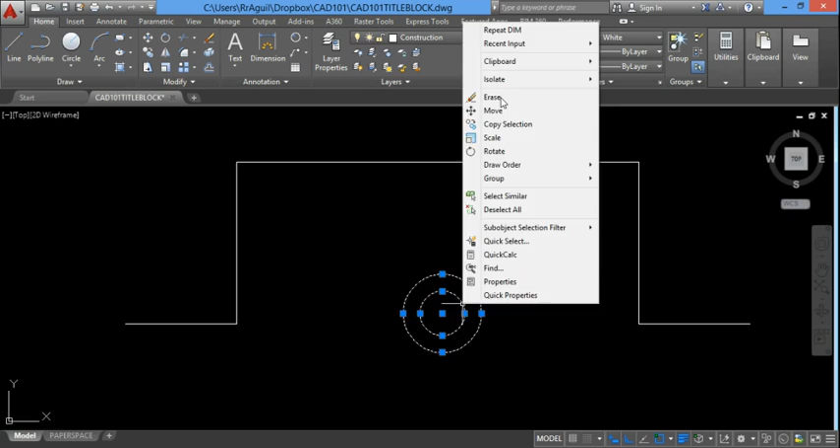Hello. This is the video for teaching you how to draw the garage door handle from lesson 4A.

I've already drawn portions of this object using the polyline command. One dimension is not labeled in the directions, and that's the thickness of the part. To determine the thickness of the part, you will have to do the following steps, which you see in step number 5, determining the thickness of the part.

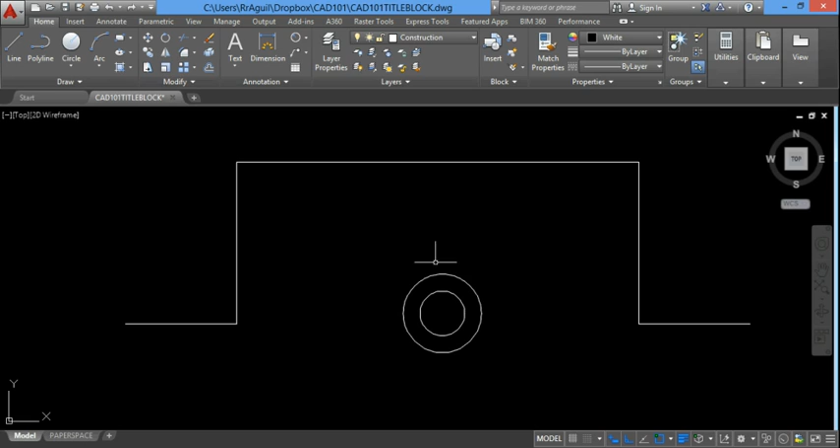Looking at our drawings, we see two radiuses of 1/4 and 7/16. You will need to draw two circles of 1/4 and 7/16, and then measure the difference between them. So I'll measure the distance between the two, and I would get 3/16. That'll be the thickness of the part. So the height of this is 2 minus 3/16, or as you gathered by now, 1 and 13/16.

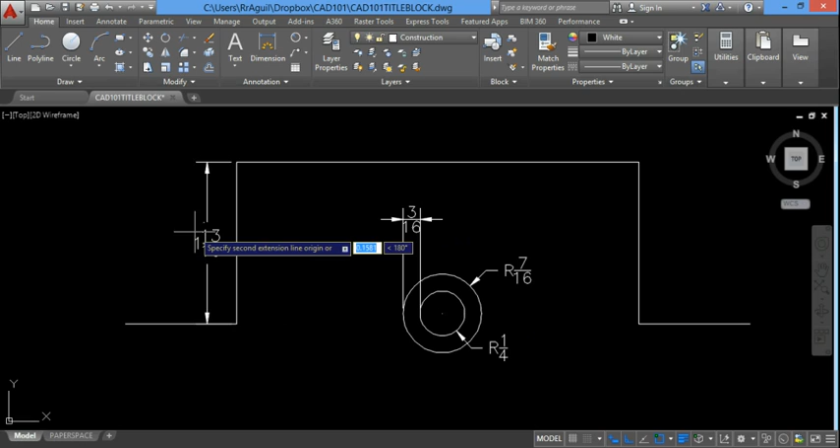Alright, so let's begin. I'll use the offset command first, set it to 3/16, and offset this object down. Then I'll use the fillet command and fillet it with two different radii. The exterior fillets are all 7/16, and the interior fillets are 1/4.

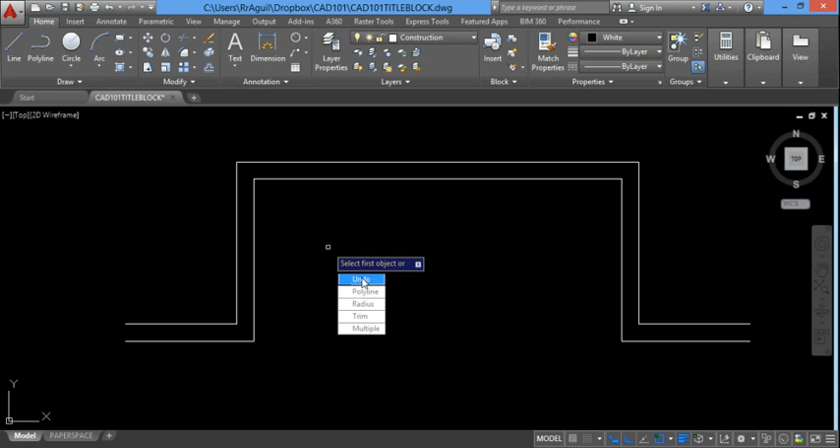When you pick the fillet command, hit the down arrow, choose radius first, and set your first radius. I'll do the 7/16 first, and then fillet all four sides on the exteriors of the garage door handle. I'm hitting enter with my keyboard to repeat the command. You could also right click or repick the command itself.

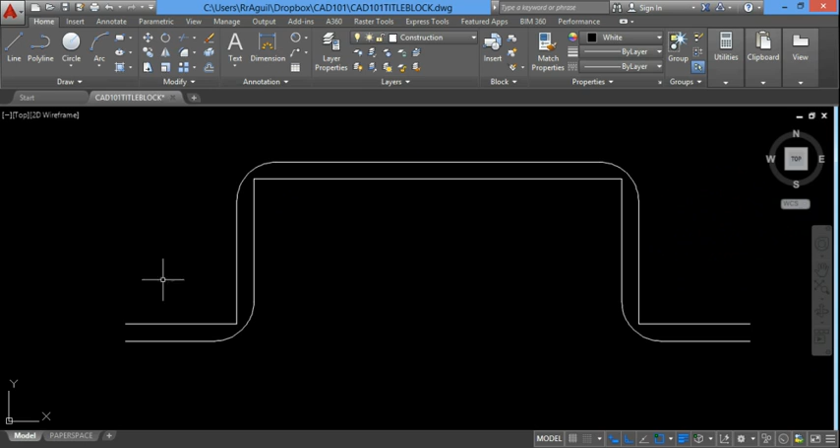Now to fillet the other four parts, I have to change the radius, so I will activate the radius first and change it to 1/4, and then repeat this 3 more times. From here, continue drawing the rest of the features according to the steps. I will get back to you shortly.

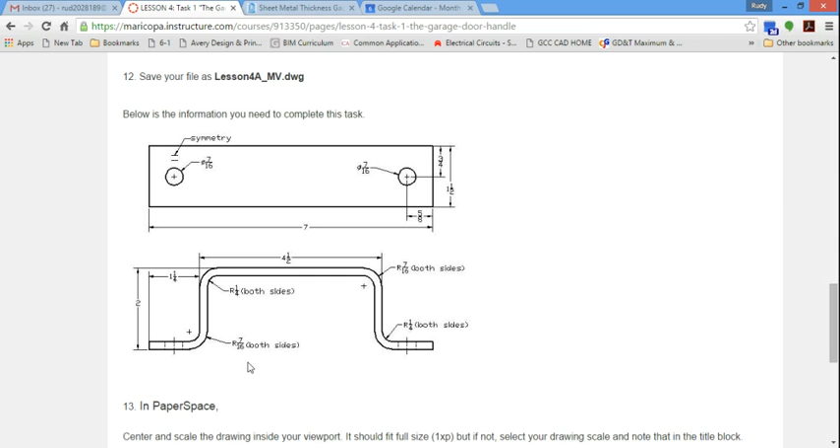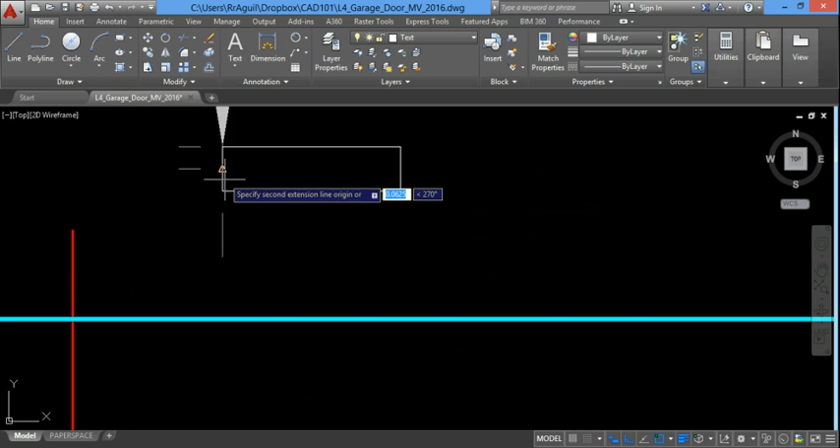So now I need to draw the symmetry symbol. It's going to be about 1/8 tall. Check my measurements of this rectangle I drew. Alright, so I'll draw some lines in about that height. Just bring this up here.

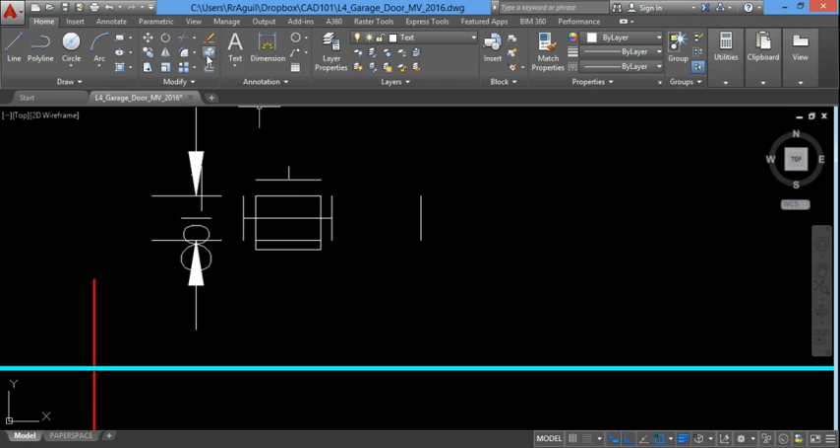I think I see it. Let me explode everything. Get rid of all this stuff I don't need anymore. And there's my symbol. That denotes symmetry, so it belongs over here.

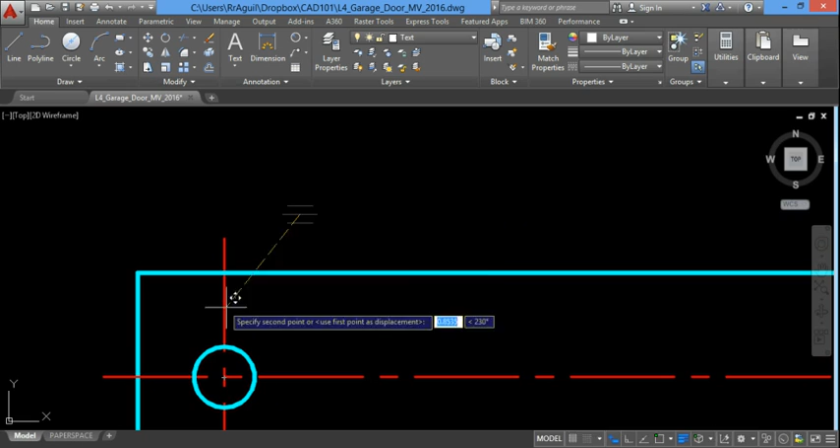So I shall move that from the midpoint to here, roughly right there. I could turn on nearest, I guess. Make sure it's directly on the object. Nearest allows me to do that. There's nearest right here. Alright, so I'll be notating that as I dimension the drawing. I'll get back to you in a second.

Okay, now that most of the dimensioning is placed, I want to explain to you why things are where they are. The location of the two holes will be at the same corner, unlike you see on the drawing where it's split into two parts. It's best to keep them both on the same corner.

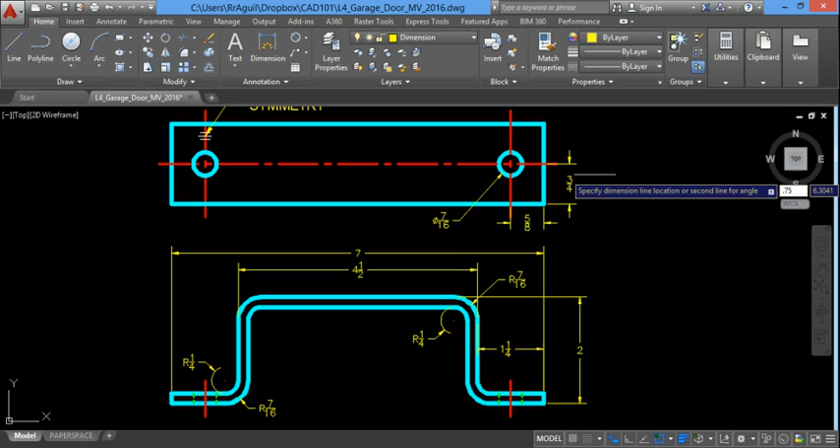I need to dimension the depth of the part and place that as well. This distance was 1/2 of an inch away. This is going to be 3/4 of an inch away. And if it's too close, as you see sometimes where the midpoint of an object line, the midpoint of extension line and the dimension line do intersect, you just pull it back further.

The notation of symmetry implies that this information on the right will be the same as the left. However, you have to be explicit with the holes. The dimension of the holes has already been placed. You can add text to the dimensions by right-clicking, going to Properties, and as the Properties window loads, there's a section there for you to add more text. So let's look for that by scrolling through. Make this larger so it can be read.

In this section here called prefix and suffix, we're going to add text in the suffix section indicating that there's two holes. So I would just need to type in capital X space 2, and that's basically it. Click outside, hit the escape key. That means there's that many. I forgot that there's no spaces. I had to put that space in, so let me get that in there. And there it is, legible like that.

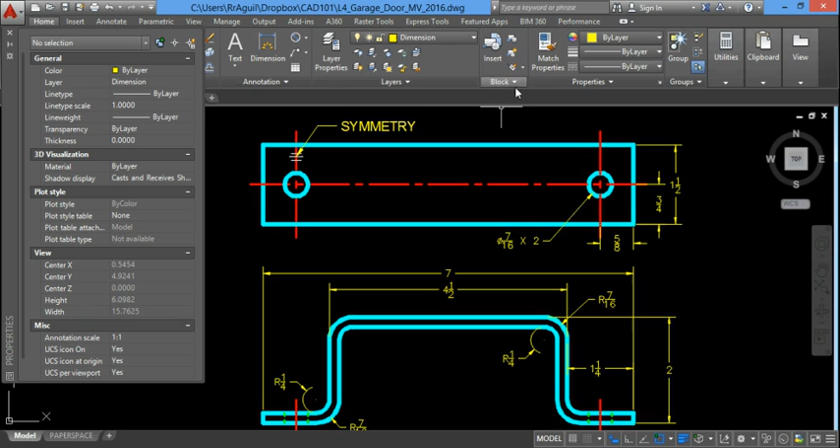That was a leader line. I used the leader command to draw that right here. And we had to describe the fact that the fillet radiuses apply in more than one location. Another way to add text is to double click here, and you'll get this nice feature where you can type in text directly on the screen. So we need to place that in a few locations. Never seen these features before. It's kind of nice to have that.

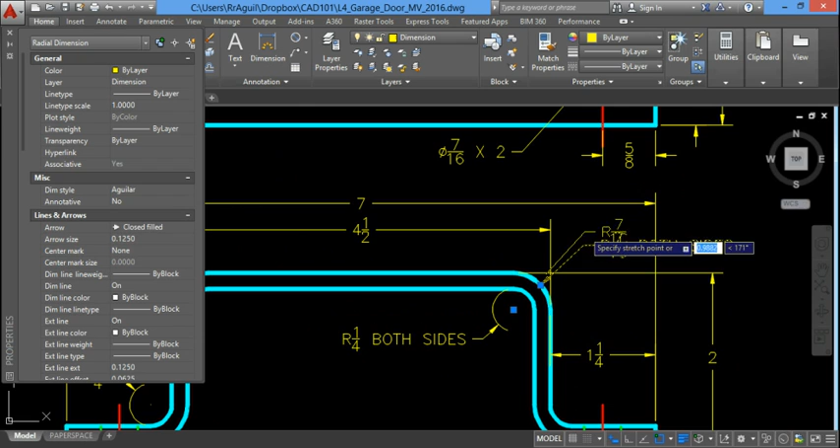I have an issue right there with regards to the words and the extension line overlapping, so I will need to move this to accommodate that. And right here. I believe that's all of our dimensions. Let me verify. Yes, it is.

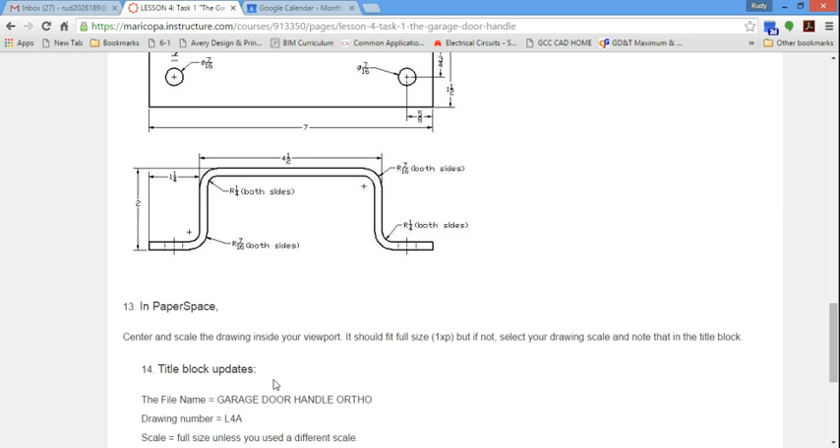Now we got to do what it says here to do in paper space. I'll close this window. I'll click on paper space. My title block is there from a previous drawing. I would update the title. I don't know my scale as of yet. And everything else you see here.

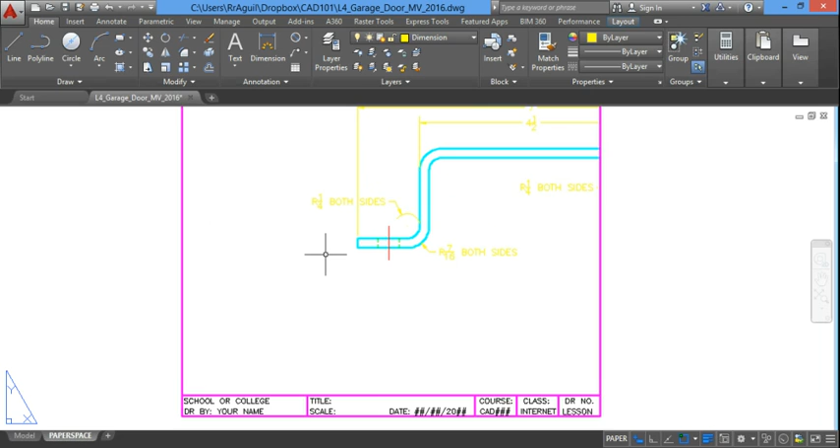So let's see if 1XP works. So I will click inside my viewport. Type in Z enter, E enter to center the drawing. And then Z enter, 1XP enter to check the scale. Stretch just a little bit. I'll go to PS. I will go to my print settings and see if all of my text is within the title block.

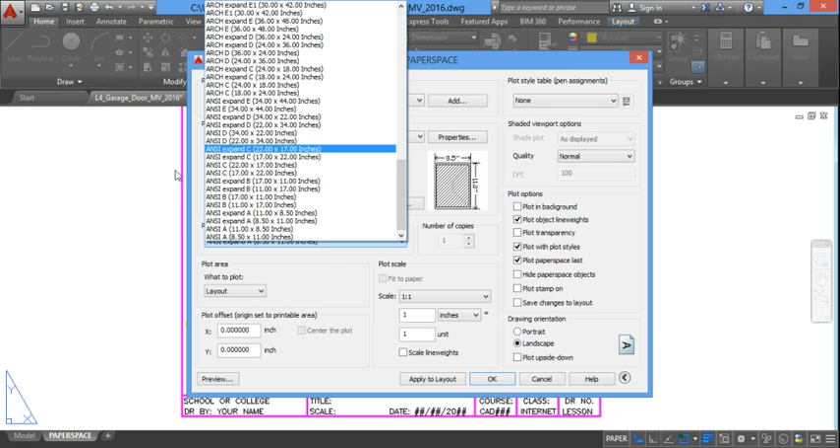A lot of new features with this new program. I'll leave it there to see what that is. This probably is the right one. Extents, 1-to-1, center the plot, monochrome, apply to layout, preview.

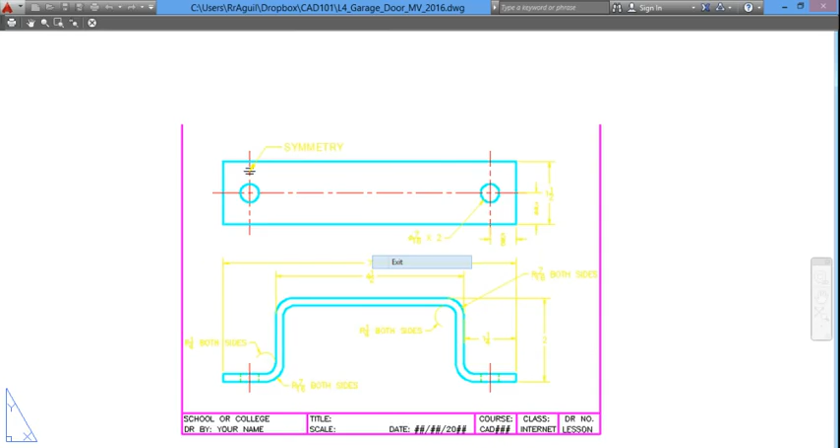Everything fits. But let's say it did not fit. Let's say that the words were off this viewport and you couldn't see them. Then I would go here and make some adjustments by bringing my text in closer to accommodate that problem. Click back inside the viewport, Z enter, E enter, Z enter, 1XP enter, PS enter.

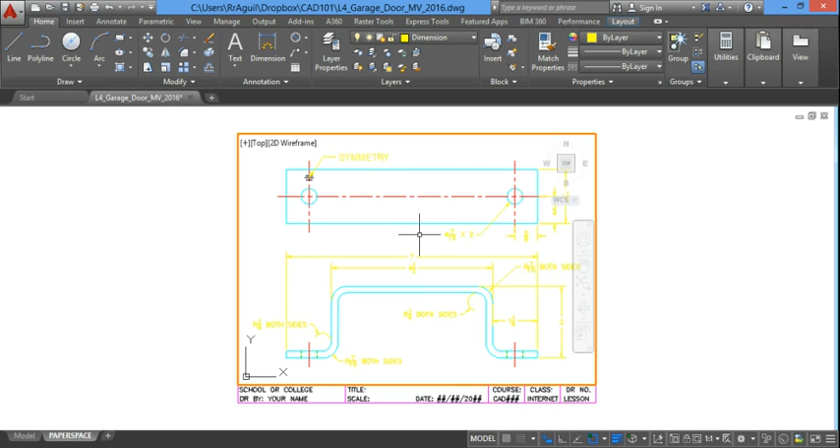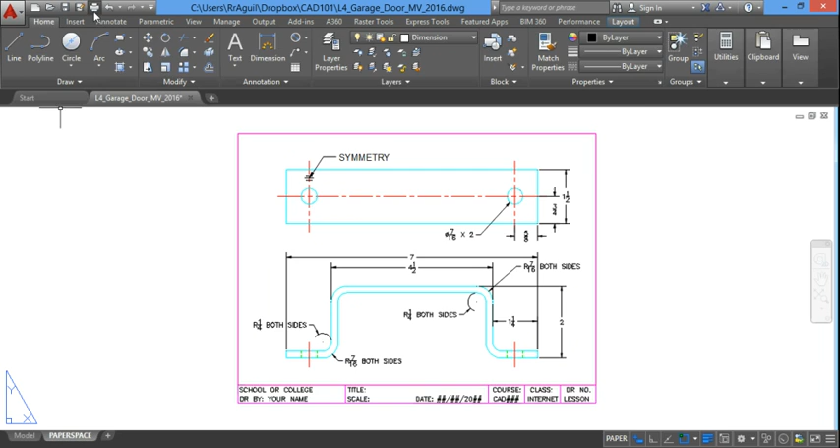If you can't see yellow very well on white, you can simply just change your text and dimensions from yellow to white, and then they'll appear, and that'll be easier for you to see before you go to a print preview. From here, I will print it. In your case, save the file and then place it in Canvas for me to grade.